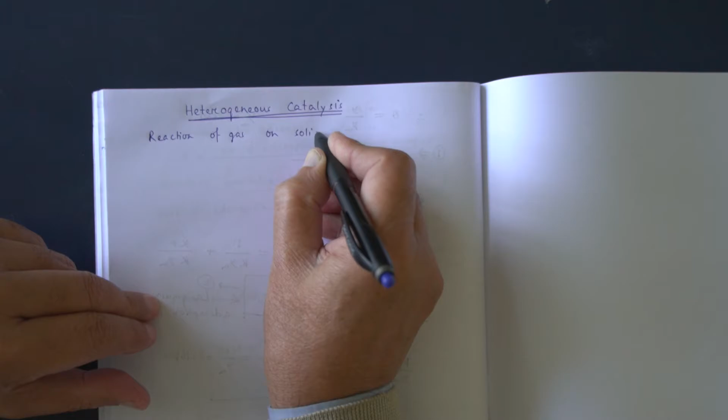Now, heterogeneous catalysis is basically adsorption. It is a surface phenomenon. Let us consider the reaction of gas on a solid catalyst. Suppose this is an example of heterogeneous catalysis, where iron is the catalyst, this is solid, and we get ammonia.

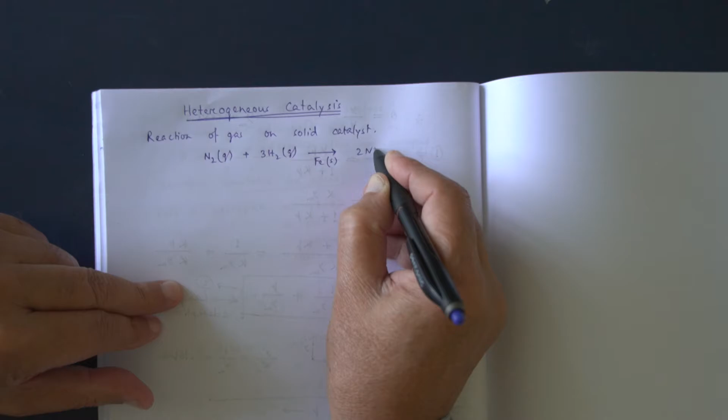So here the reactants are gases, nitrogen gas and hydrogen gas, and the catalyst is the solid. So we will discuss heterogeneous catalysis in the case of this type of reaction, where reactants are gases and the catalyst is solid.

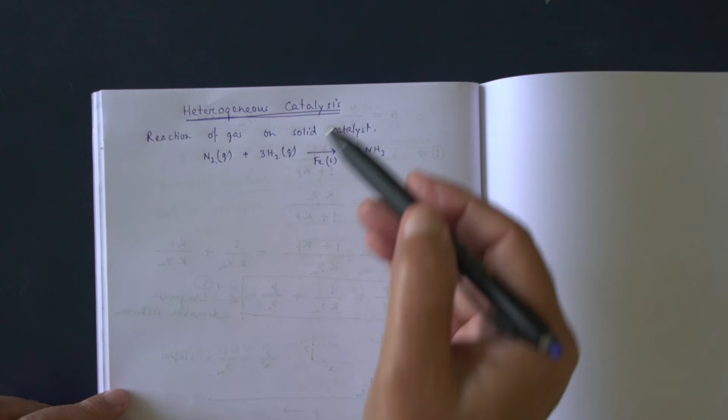As we have already discussed, this catalytic reaction takes place on the solid surface. Say this is the catalyst, the iron. Nitrogen is adsorbed on the surface, hydrogen is adsorbed on the surface, then reaction between the two takes place. As a result, ammonia is produced.

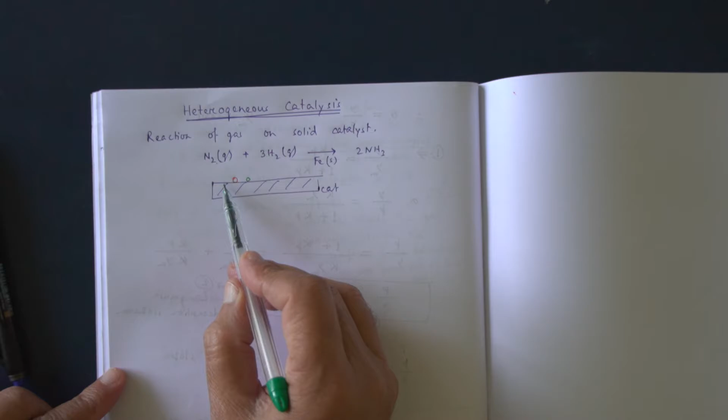So this reaction between nitrogen and hydrogen takes place on the surface of the catalyst. So this is surface chemistry. Heterogeneous catalysis is basically surface chemistry because the reaction takes place on the surface of the catalyst.

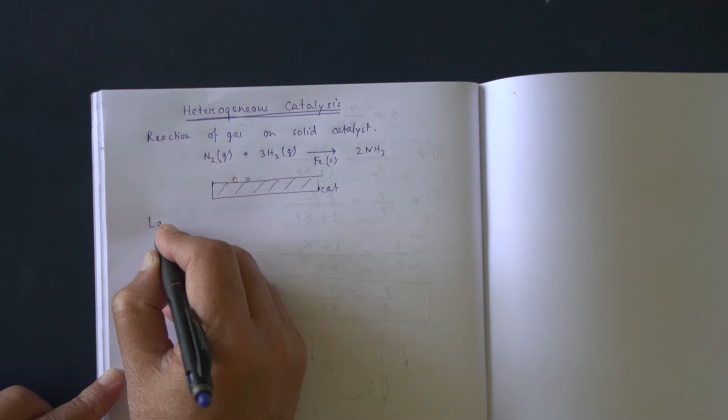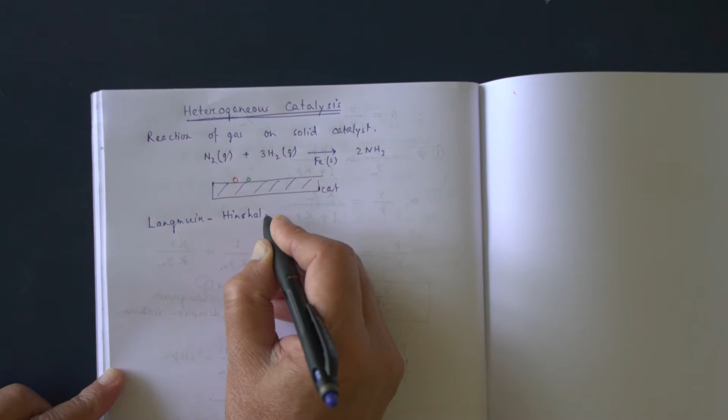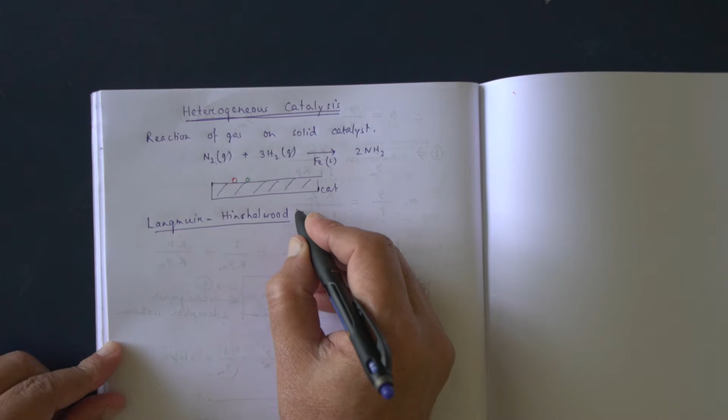Langmuir and Hinshelwood, two scientists, proposed a mechanism of heterogeneous catalytic reactions. What is the mechanism proposed by Langmuir and Hinshelwood? Let me write it like this: Langmuir and Hinshelwood proposed a mechanism for heterogeneous catalytic reaction.

According to the Langmuir-Hinshelwood mechanism, the heterogeneous catalytic reaction takes place in five steps. So, what is the first step?

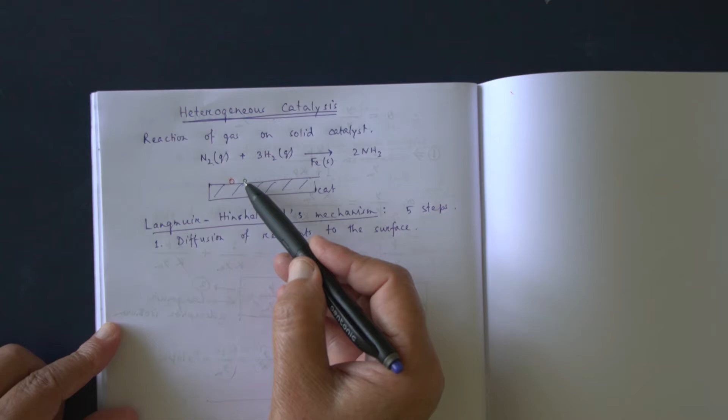The first step is the diffusion of reactants to the surface. This is the surface of the catalyst, and reactant molecules are coming. Suppose initially the reactant molecules were here, so here the density of reactant molecules is more.

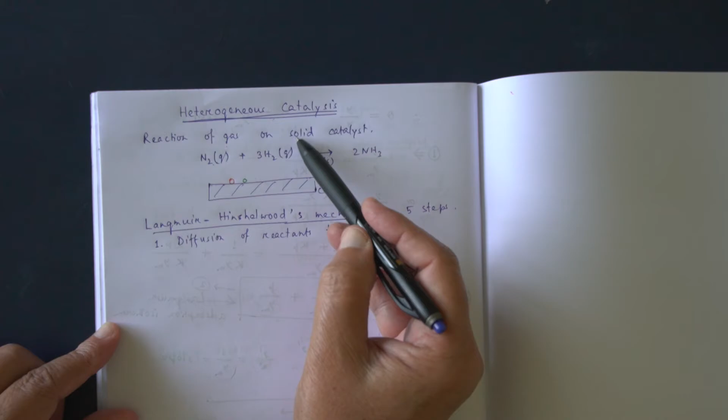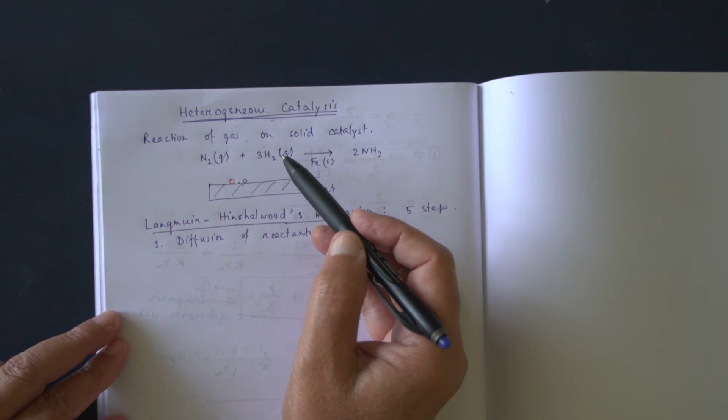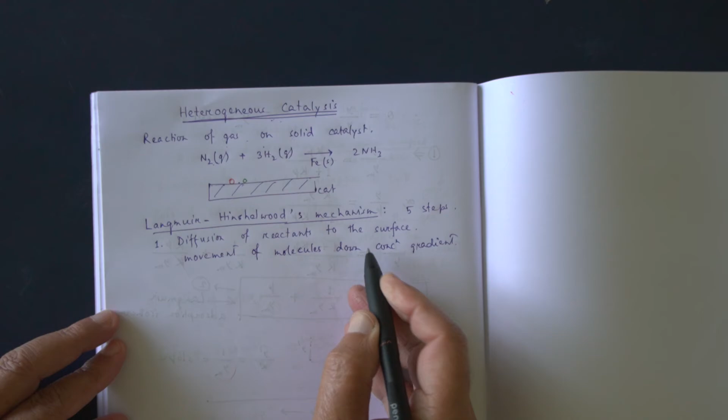So they are diffusing, from higher concentration to lower concentration. Movement of molecules down a concentration gradient is called diffusion. So what is a concentration gradient? Suppose the molecules are moving along the x direction.

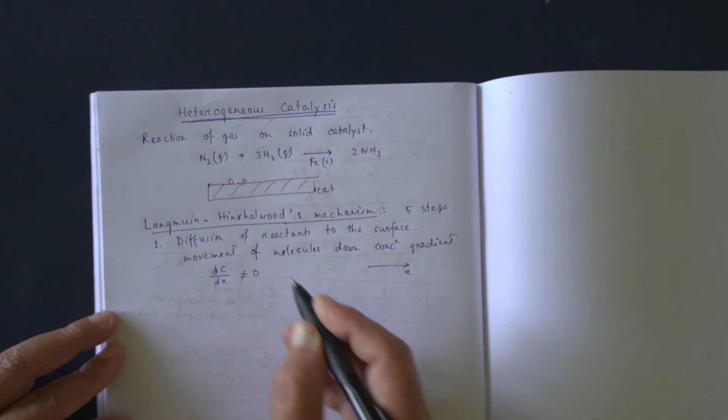If there is a concentration gradient, that means dc/dx is not 0. At each point, concentration is not the same. If concentration is the same at each point, dc/dx will be 0. But if it is not the same, dc/dx will not be 0, so we say there exists a concentration gradient. From higher to lower concentration the molecules move, and that is called diffusion.

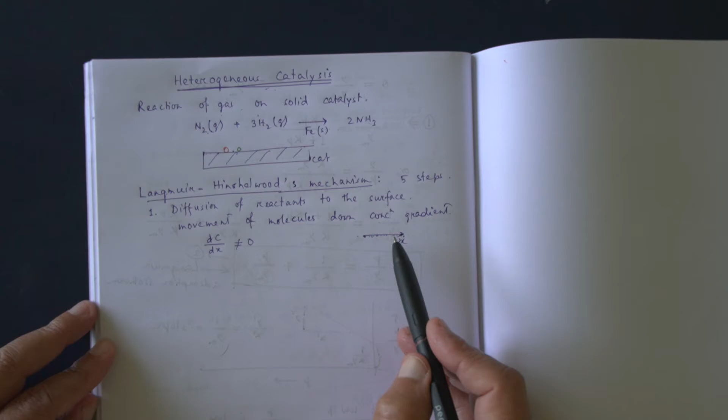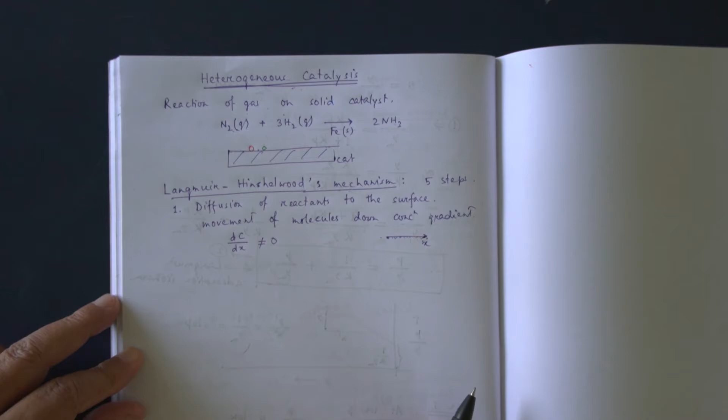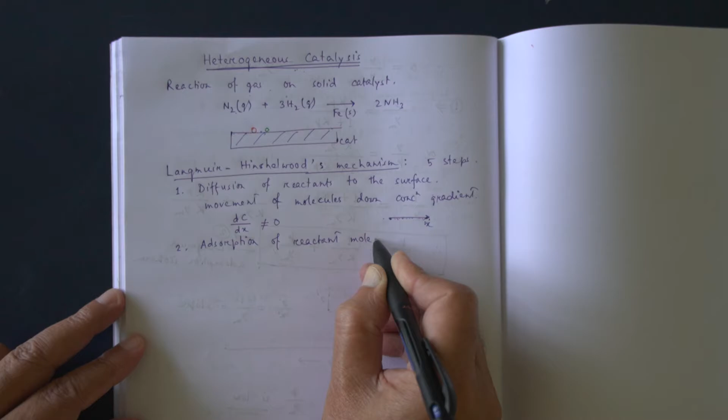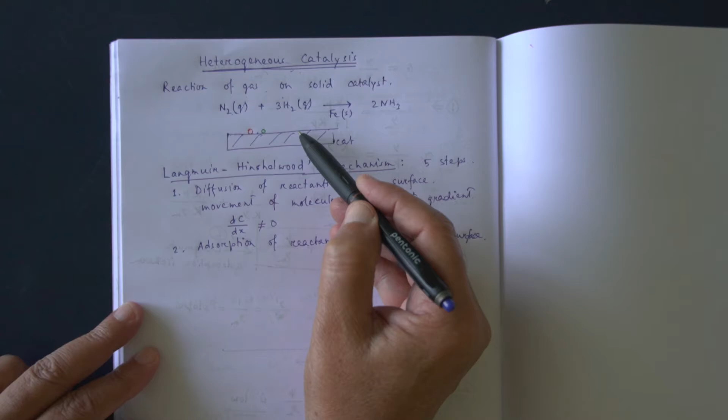So molecules are coming from higher concentration to lower concentration: diffusion of molecules to the surface of the catalyst. This is the first step. The second step is the adsorption of reactant molecules on the surface. Molecules come to the surface by diffusion, then adsorption happens. As a result of adsorption, energy is released.

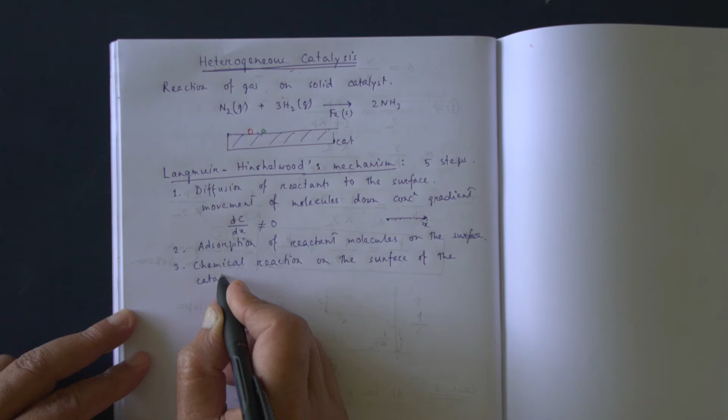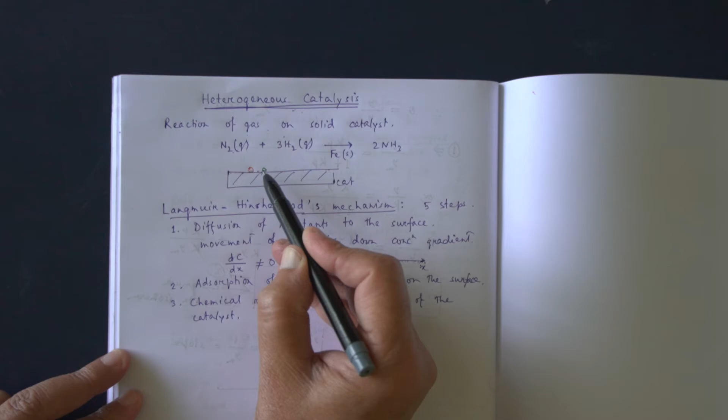Number 3, chemical reaction on the surface of the catalyst. Reactant molecules come to the surface, then adsorption. After adsorption, reaction takes place between the reactant molecules. So chemical reaction is the third step.

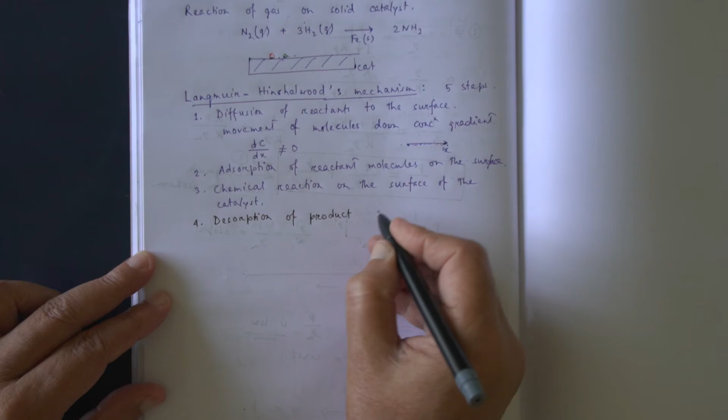The fourth step is the desorption of products, product molecules from the surface. Suppose this is the product molecule. Desorption means this bond, the attractive force to the surface, is broken.

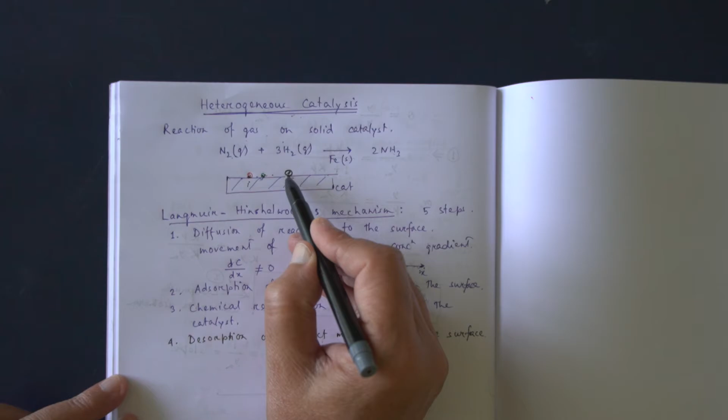So what is desorption? The reactant molecules are bound to the surface; there is attraction between the surface and the molecules. Now here, this is the product molecule, and the attractive force between the molecule and the surface is broken. That is called desorption of product molecules. Then the fifth step is the diffusion of products from the surface.

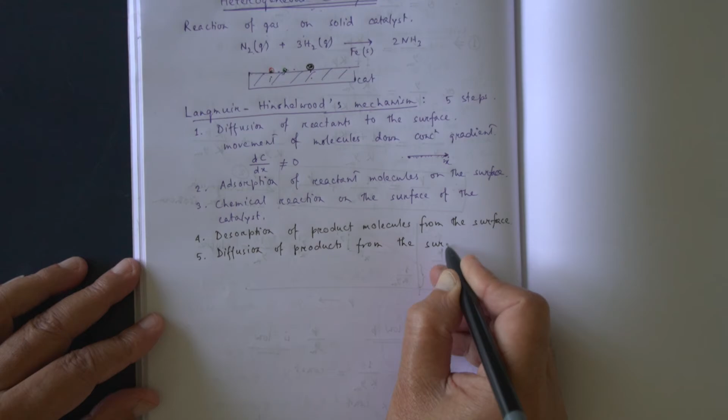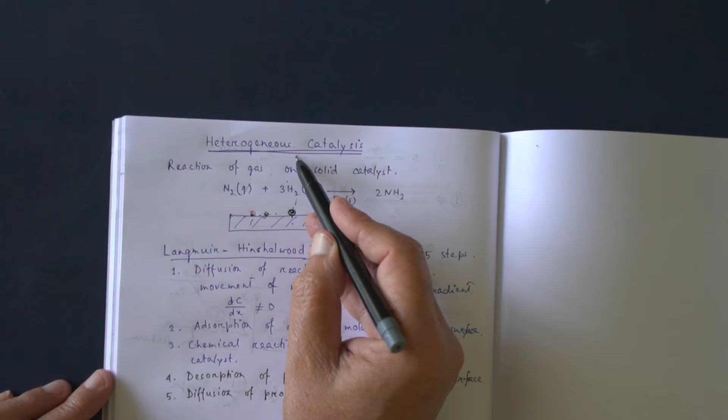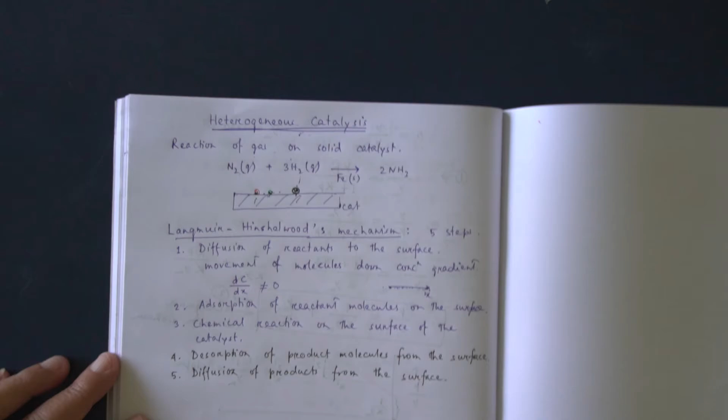Now the product molecules move. There is higher concentration of product and there is lower concentration of product, so product molecules are moving. Diffusion of product molecules from the surface of the catalyst. Okay, so these are the 5 steps according to Langmuir-Hinshelwood mechanism. These are the 5 steps.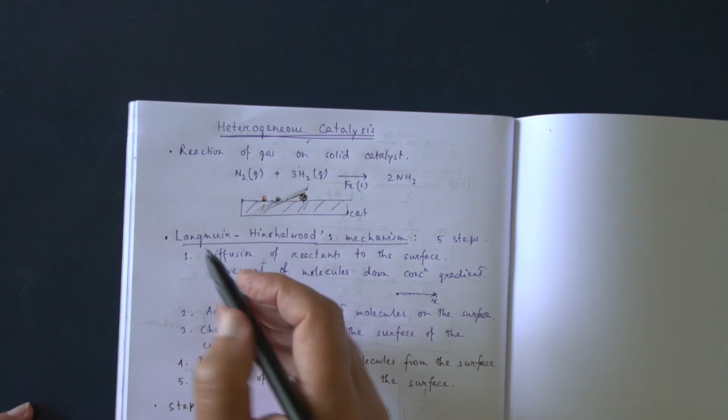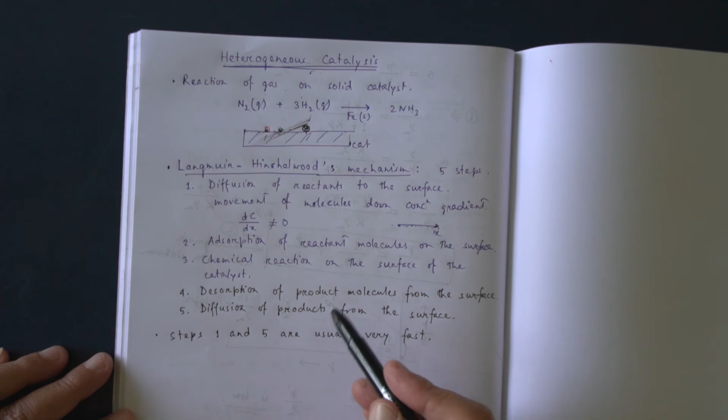Now here it is assumed that steps... so this is the number 1 point. Reaction of gas on solid catalyst we consider, and this is Langmuir-Hinshelwood's mechanism. And number 3 point is that steps 1 and 5 are usually very fast. So these 2 steps 1 and 5, these are generally very fast steps. They are coming and they are going. So these are very fast steps.

Then steps 2 and 4 are also generally fast. Generally fast. Okay, so the third step is the step 3. Step 3 is generally the slowest step. Okay, generally this is the slowest step. And step 3 means this is the chemical reaction.

Okay, step 1, step 2, step 4, step 5, these are not chemical reactions. I repeat, step 1, step 2, step 4, step 5, these are not chemical reactions. So which is the chemical reaction? Step 3 is the chemical reaction, and generally this is the slowest step in the mechanism. And slowest step is called, hence it is, the rate determining step. Let me call it RDS, rate determining step. Obviously slowest step is the rate determining step.

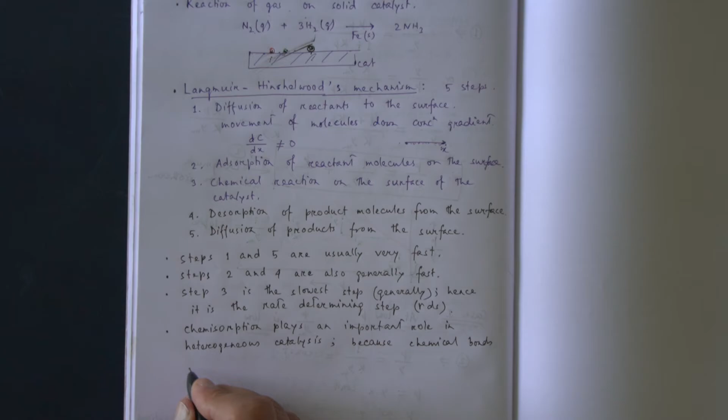Okay, now Langmuir and Hinshelwood further consider that chemisorption plays an important role in heterogeneous catalysis. That is why chemisorption plays an important role, because chemical bonds are formed between adsorbate and adsorbent.

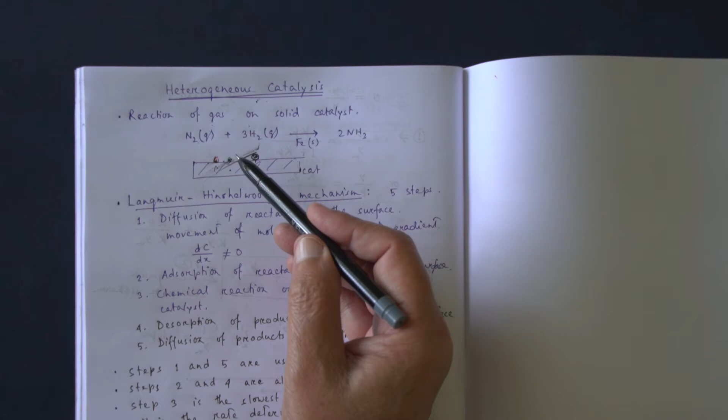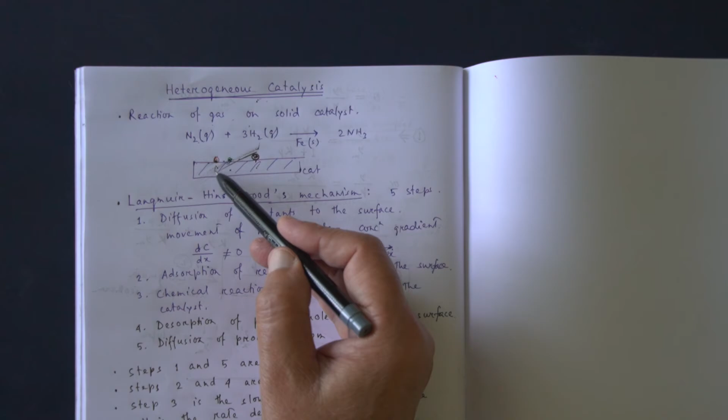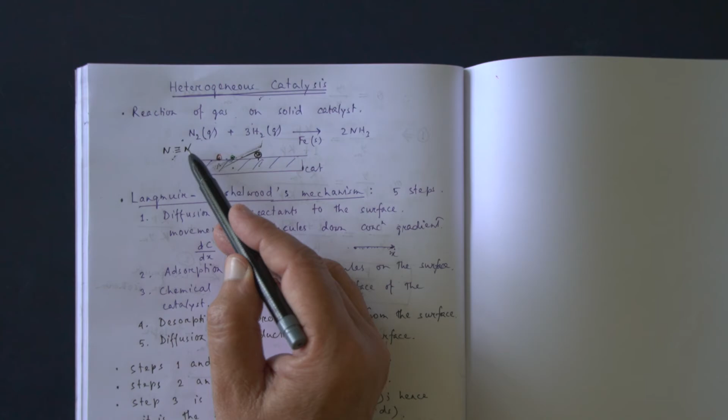Okay, so chemical bonds are formed between adsorbate and adsorbent. So chemical bonds are formed, that means more energy is released. Enthalpy of adsorption is more in case of chemisorption. So more energy is released. This will help in breaking the bonds between the reactant molecules. There is triple bond between the two nitrogen atoms. The energy released in chemisorption will help in breaking this bond, because this bond between the two atoms must be broken. Similarly, this bond between the two hydrogen atoms must also be broken, and new bonds between nitrogen and hydrogen will be formed.

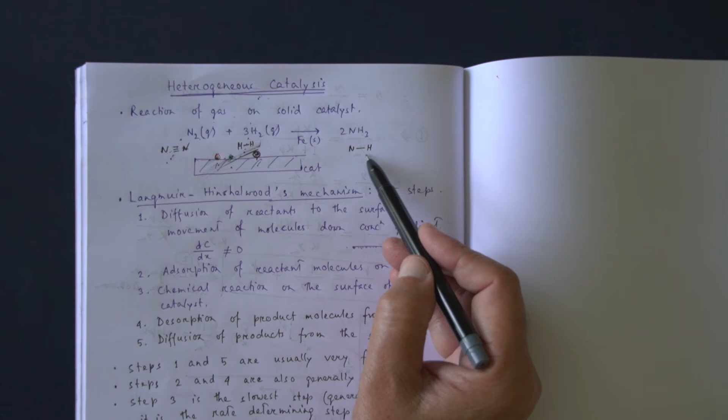So in this reaction, what happens? This bond is broken, triple bond, this bond is broken, single bond, and new bonds are formed. New bonds are formed means energy is released. Bond is broken, that means energy is absorbed.

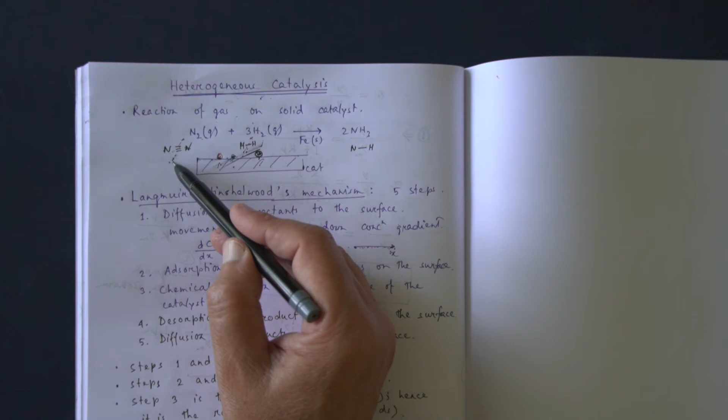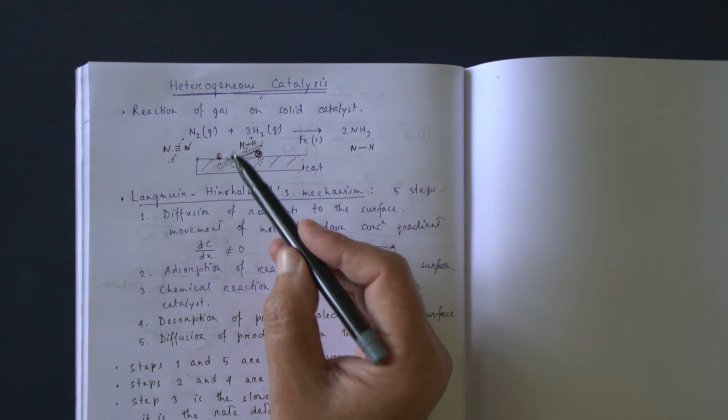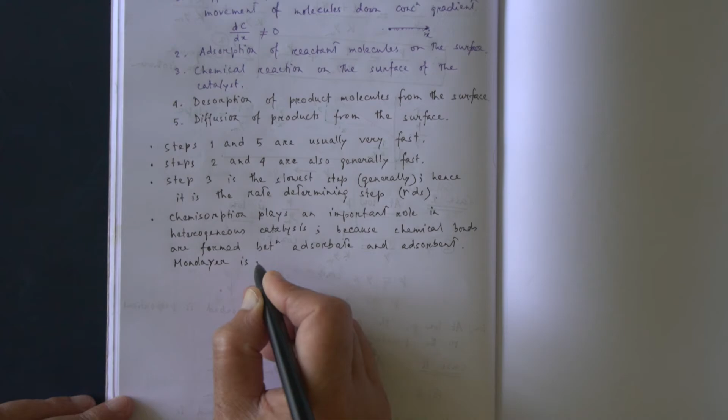Okay? So chemisorption plays an important role. And chemisorption means here monolayer is formed. We have already seen in chemisorption monolayer is formed. That means one layer of molecules are adsorbed. Not two layer, three layer, not like that. Only one layer is formed, that is monolayer.

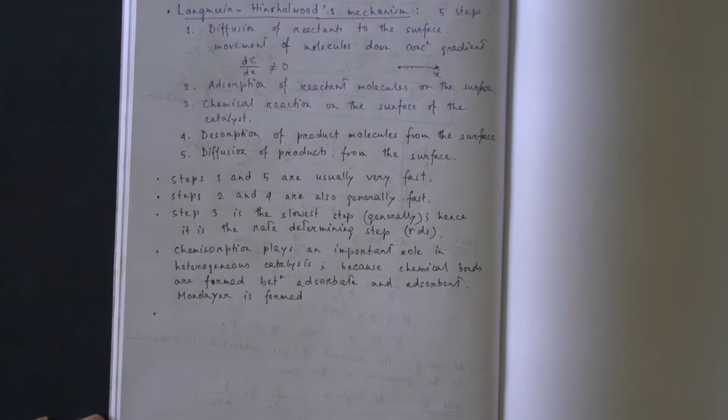Next point Langmuir and Hinshelwood considered is that the rate of reaction per unit surface area of the catalyst is proportional to the fraction of surface occupied by the reactant molecules.

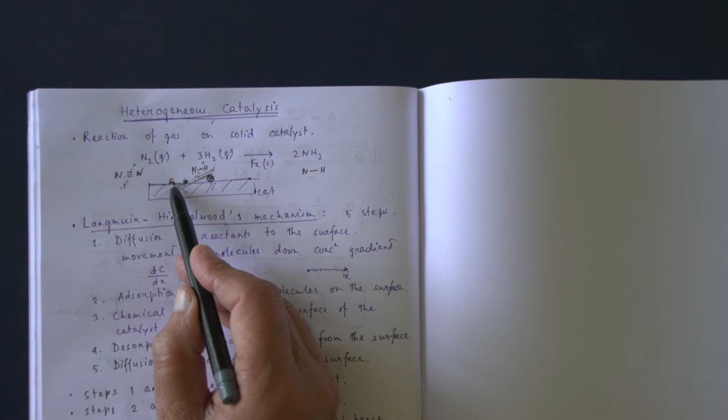Okay, so we have already seen fraction of surface covered. Fraction of surface covered generally we represent as theta. Theta is the fraction of surface covered. What is fraction of surface covered? That means surface covered by the reactant molecules divided by total surface of the catalyst. That is the fraction of surface occupied by the reactant molecules.

So we discussed about this. And rate of reaction is proportional to fraction of surface covered. That means we can say that rate is equal to k2 into theta, where k2 is the constant.

Okay, so we'll talk about this. So we can write like this, or simply we can write, say, r is equal to some constant k into theta. This is obviously because surface to

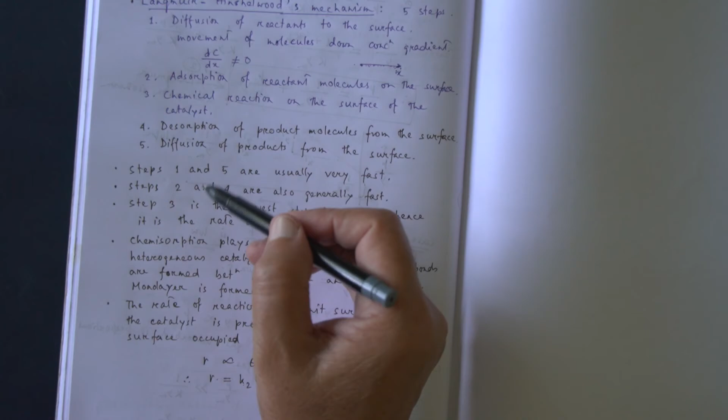Now let us discuss about kinetics of unimolecular surface reaction. That means kinetics of heterogeneous catalysis. Surface reaction means heterogeneous catalysis. So kinetics of heterogeneous catalysis, and order of the reaction is 1. Unimolecular reaction means order of the reaction is 1.

Now, what is the mechanism of the reaction? Mechanism of the reaction is like this. Suppose R is the reactant and it is gas, and S is the surface. Okay, then this will be adsorbed. Suppose K1 rate constant, so we get RS.

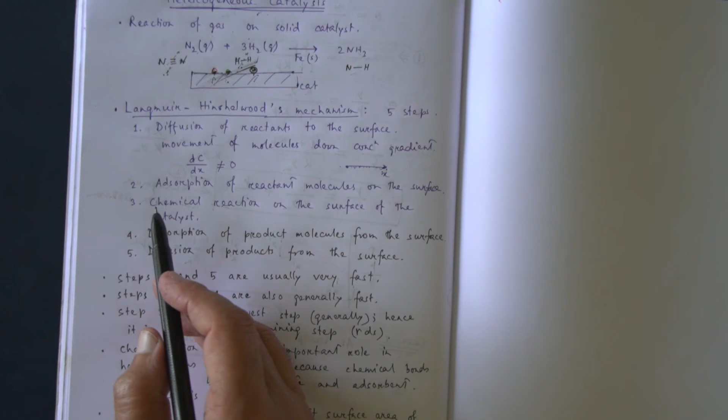Okay, so this is the chemical reaction, and here it is step 3 in the general mechanism, chemical reaction. So these are the two steps in the unimolecular surface reaction. Step 1, adsorption, at the same time desorption, and step 2, chemical reaction.

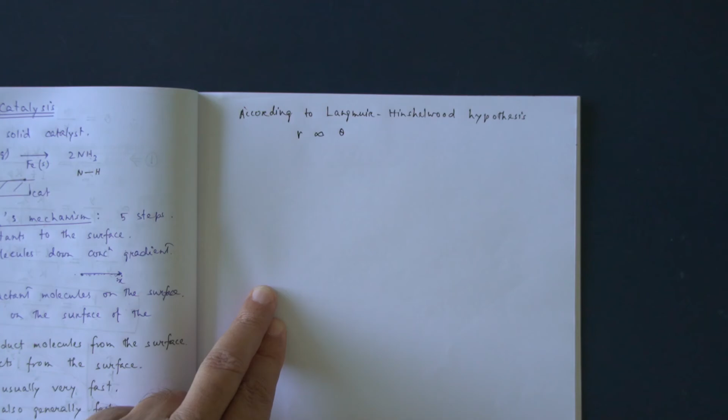Now, according to Langmuir-Hinshelwood hypothesis, rate of reaction is proportional to fraction of surface covered. That is, R is equal to K2 into theta. This is the K2. This is the chemical reaction. Rate constant is K2. So rate of the reaction is proportional to this.

And this is the slowest step. So rate of the reaction is this. So this is, say, equation number 1.

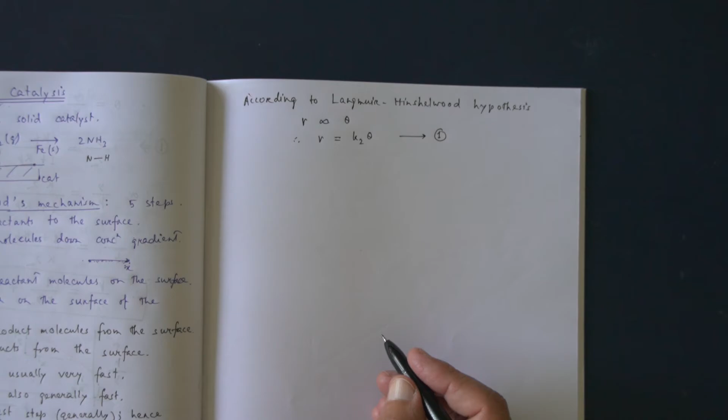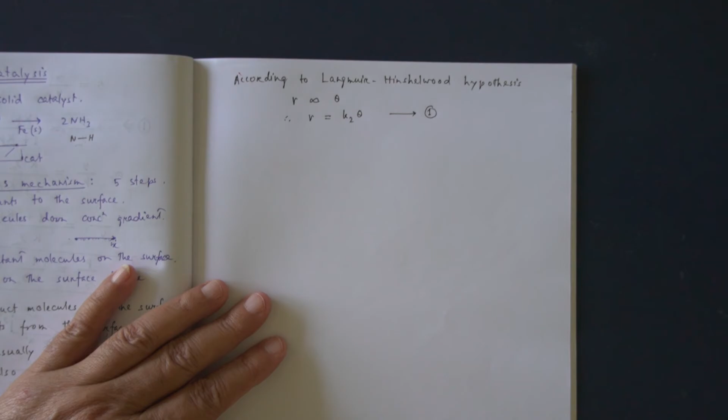Now, if we look at the mechanism of the reaction, from this slowest step, what we get? Slowest step is the rate determining step. From this slowest step, we get that R is equal to K2 into concentration of RS. We also get this because this is the rate determining step.

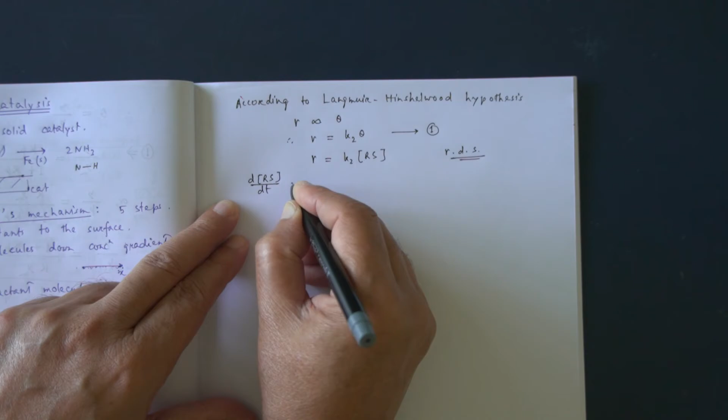Now this species is just like intermediate. So we can write rate of formation of intermediate from the mechanism. Due to this step, this is formed, so positive. Due to this step, concentration of RS decreases, so minus. Again, concentration of RS decreases, minus. So what will be this?

This will be equal to K1 R, concentration of S, minus K minus 1 RS minus K2 RS. Now according to steady state approximation, dRS/dt is 0.

So we get, say, K1 RS... so this will be equal to 0. So let me write it like this. This is 2. So from 2, what we get? We get this is equal to K minus 1 plus K2 concentration of RS. So what is concentration of RS?

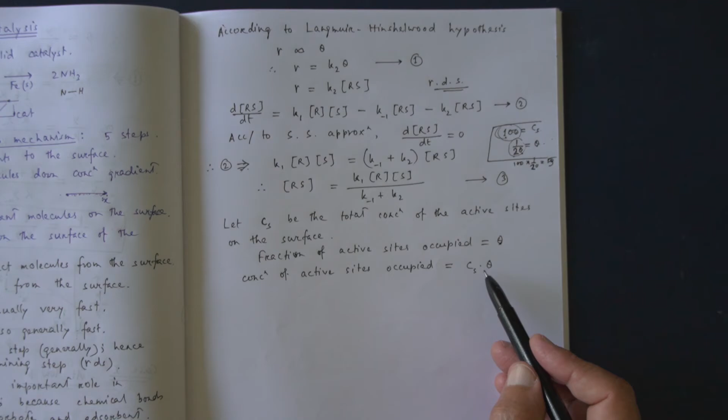That means CS into theta. So this is the concentration of active sites occupied by reactant molecules. Okay, so what is the concentration of active sites unoccupied? This is the total concentration, and this much occupied. So how much unoccupied? This minus this. Or we can write it like Cs into 1 minus theta.

That means concentration of active sites unoccupied is equal to Cs into 1 minus theta. And concentration of active sites occupied is equal to this, and that must be equal to the concentration of RS, because occupied means that much reactant surface complex has formed, so this will be equal to this.

Okay, so from 3 what we get: Cs into theta equal to K1 R into Cs into 1 minus theta divided by K minus 1 plus K2. Cs cancels. So we get theta equal to K1 R into 1 minus theta divided by K minus 1 plus K2, or theta by 1 minus theta equal to K1 R by K minus 1 plus K2.

Hence, from 5, what we get? 1 by R equal to k minus 1 plus k2 plus k1r, by k2 k1r. Okay, so this thing I can write it like this: k minus 1 plus k2 by k2 k1r plus 1 by k2. Okay, 1 by k2. So we are getting one expression like this.

Now why we are finding out this equation? Say this is equation number 6. Now using this equation we can draw graph between, say, 1 by r and 1 by concentration of R. We can draw graph. Okay, this side 1 by r, then 1 by concentration of R. We can draw this graph. Okay, so obviously what we get? We will get a straight line.

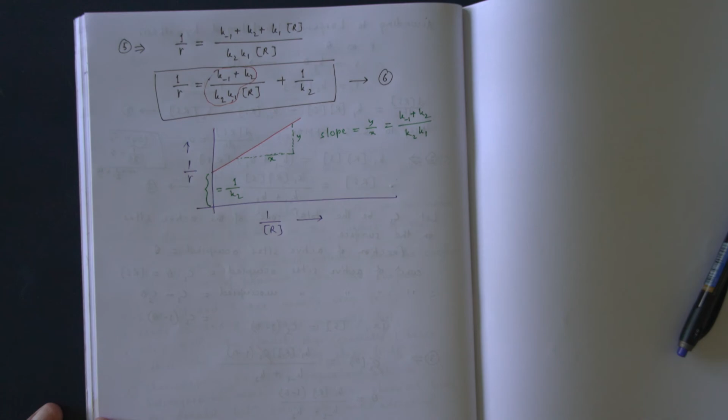Now, so this is the expression for the rate of the reaction, equation 5. Now for gaseous reaction, because we are considering gaseous reaction, we can write pressure of the gas in place of concentration of reactant. For gaseous reaction, we can write pressure of R in place of concentration of R. That's what we get for gaseous reaction.

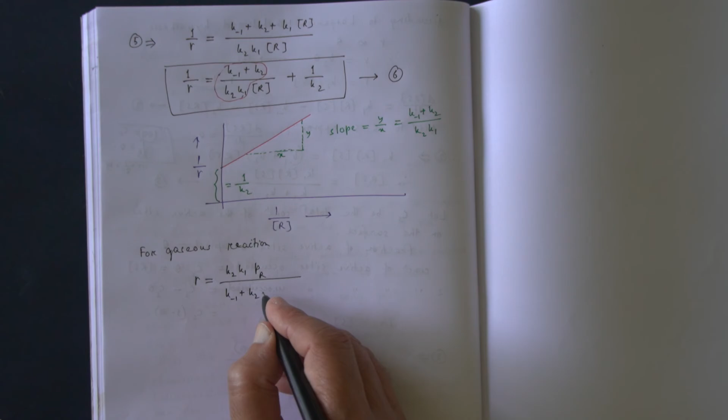For gaseous reaction, R will be equal to K2 K1 pressure of R divided by K minus 1 plus K2 plus K1 pressure of R. For gaseous reaction, we get this. So this is equation 7. Okay. Again from 7, we can write it like this.

1 by R equal to K minus 1 plus K2 by K2 K1 into 1 by PR plus 1 by K2. As before we have already done, we can write it like this. So again, let us consider some cases. Say case 1.

Case 1, say rate of reaction is very greater than adsorption and desorption. Adsorption means rate constant K1 and desorption means rate constant K minus 1, and rate of reaction means rate constant is K2. Okay, this is very greater than this. So we can write that K2 is very greater than K minus 1 plus K1 R.

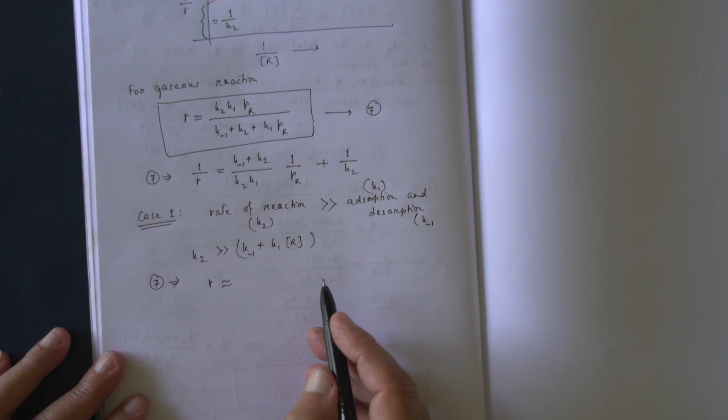So what we can do? From 7, R is approximately equal to K2 K1 PR divided by K2, that is equal to K1 PR, or we can write in terms of concentration also: K2 K1 concentration of R by K2, that is equal to K1 concentration of R. So we can write in terms of pressure or in terms of concentration.

So what we find? Under this condition, rate of reaction depends on one power of the concentration of reactant. That means the order of the reaction is 1. So this is first order reaction.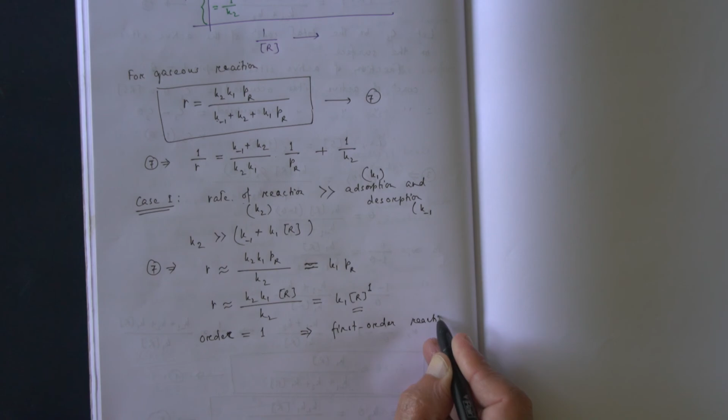So if the rate of reaction is very fast compared to rate of adsorption and desorption, if this is the case, then the reaction will be first order reaction with respect to R, reactant. First order reaction with respect to R. Okay, so this is the condition.

Next, so this is basically all about heterogeneous catalysis. Okay, I think this will be enough. You just follow this, and this will be enough, I think.

We can consider another case. Let me tell you another thing. Suppose K2, rate of reaction, is very very less than K minus 1 plus K1R. Just a reverse condition. If this is the case, then what we can write? Not from 3, this is from 5. From 5 we can write R equal to K2 K1 R.

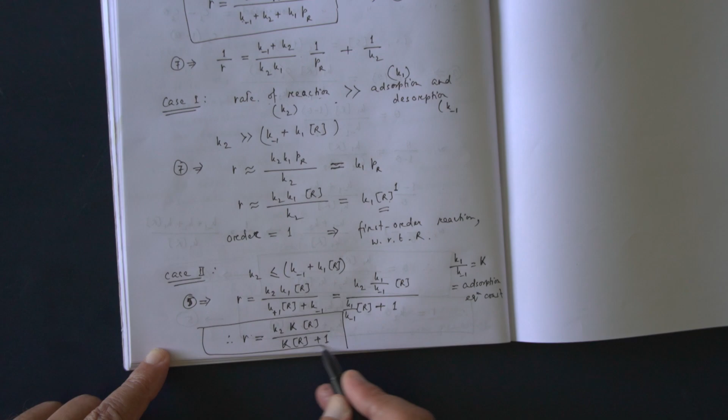So we get this. Now rate constant of forward direction by rate constant of backward direction, that is equal to equilibrium constant, K. And this we call adsorption equilibrium constant. So I can write R equal to K2 K R over K R plus 1.

Similarly, in terms of gaseous reaction, I can write R equal to K2 K pressure of R over K pressure of R plus 1. So I can write it like this for gaseous reaction. This is equation 9.

Now at very low pressure, what will happen? K PR is less than 1. So in that case, from equation 9, R is approximately equal to K2 K PR over K PR plus 1, and because K PR is less than 1, the denominator is 1, so this will be equal to K2 K PR.

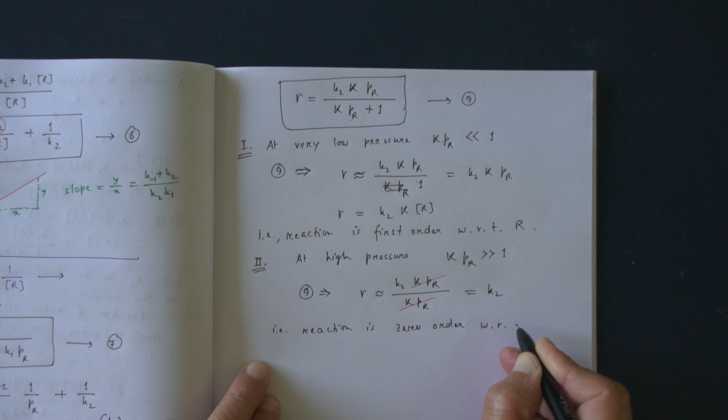Second condition, at high pressure, K PR is very greater than 1. So in that case from 9, R is approximately equal to K2 K PR over K PR, which cancels, so this will be equal to K2. That means the reaction is zero order with respect to R.

So this is all about heterogeneous catalysis. You just follow this. I think this will do. So I have completed 3 units of your syllabus: chemical kinetics, catalysis, and surface chemistry.